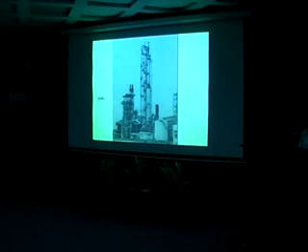To join CUFL, I had to resign from BUET, and when I returned to BUET in 1985, it was a fresh start, meaning loss of seniority along with other privileges. For all practical purposes, I have become non-existent in BUET's hierarchy. This has sometimes hurt me, but it has never stood in my way of being loyal to my students, BUET, society, and motherland Bangladesh.

Experience as a teacher. Being a teacher at BUET, I am fortunate to work and learn with the students who are intelligent, bright, and smart. The greatest resource of mine was my students, especially those who worked with me for their thesis projects and designs. While the students worked on completing the requirements of the academic program, I looked for understanding the underlying principles, why and how things work, why they do not work.

All my students have been assigned experimental projects that would require designing, building, and operation of a system. My emphasis and objectives have been to experience the system in operation and learn the limitations. With the design projects, the students were assigned to design process plants about which I had prior understanding, as the plants are in operation in Bangladesh.

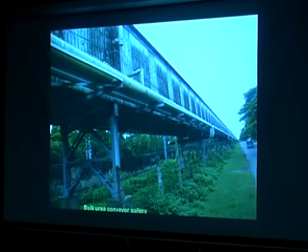The general contractor Toyo proposed to build a 3 km long covered urea bulk conveyor gallery 19 meters above the ground. The 3 km long gallery with 3 meter by 3 meter continuous covered housing with a conveyor and estimating system had to be designed to withstand a wind speed of 150 miles an hour plus gusts. Toyo was told to keep the height 3 meters instead of 19 meters, as it could not provide any justification to make it 19 meters. It resulted in a large saving for steel structure, support and foundation. It also improved safety. You can have a look at it. 3 kilometers.

The next example: the urea unit had an evaporation system to concentrate urea solution from 87.5% to 99.5% prior to prilling. When Toyo submitted the design for the evaporation system, it based its heat load on an inlet concentration of 82.5% instead of 87.5%. This meant a larger heat load requiring a larger heat transfer area.

I told Toyo that at least 30% of the evaporator tubes calculated based on heat load would have to be plugged when commissioned. CUFL management and Toyo insisted on having a larger evaporator, overruling my review on the ground that the oversized equipment would be good for the plant. Alas, when the urea plant was commissioned, Toyo encountered solid urea depositing inside the tubes, and it plugged about 30% of the evaporator tubes. If you visit CUFL, you will find that my words were not wrong.

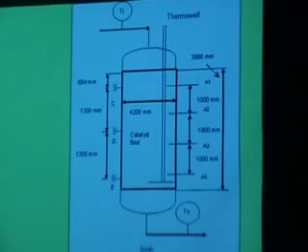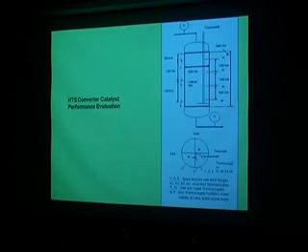With my colleagues, I participated in the commissioning of a liquid sugar plant built by a French company with French process technology, a sodium carboxymethyl cellulose plant supplied by an Indian supplier, and a liquid detergent plant supplied by an Indian supplier. For all three plants, laboratory studies of the process involving all the steps were carried out in the department to experience the process, understand the process parameters, and write the operating instructions. Plant equipment and machinery were installed under our supervision for the sodium carboxymethyl cellulose plant and liquid detergent plant.

A technical audit of 6 ammonia-urea complexes under BCIC was carried out during 2000 and 2001. It was a challenging one and a good opportunity to learn the inside of these plants. This was multidisciplinary teamwork, and Professor Mahmood has talked about it while he was introducing me. So you can see all the 6 plants that we audited.

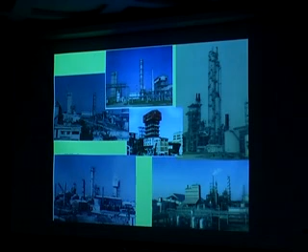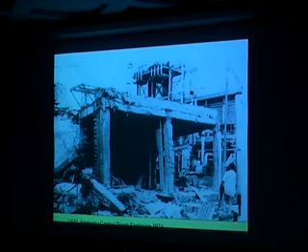I had the opportunity to investigate the urea fertilizer factory explosions that took place in 1974 and 1991. These were catastrophic accidents leading to the loss of life, property, and production. This is the 1974 explosion of the ammonia control room. In one case, it was a design fault which allowed air to flush the natural gas filter, and in the other case, it was negligence and a contract violation of the general contractor. For both cases, Toyo was responsible.

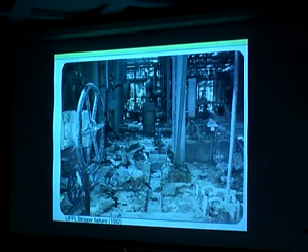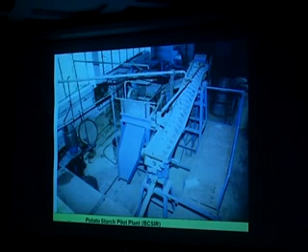During the period 1992 to 95, I was assigned by the then chairman of BCSIR, Dr. Jaman, to design, construct and operate pilot plants to demonstrate the operability and viability of 10 selected processes developed by BCSIR. 10 separate pilot plants were built in the pilot plant section of BCSIR. This was an interesting experience for learning how issues and steps often missed during the laboratory scale work can undermine operation of pilot